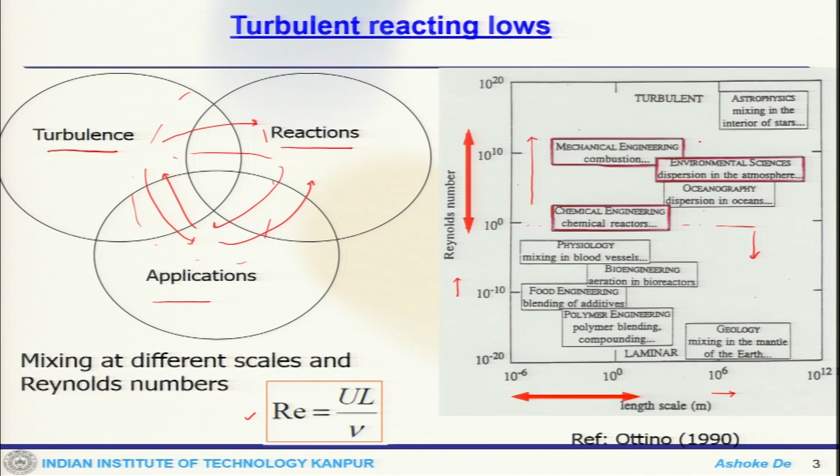Now if you look at the range of application, there is a wide range of application, and on this axis it is the length scale, and this is the Reynolds number. So this is the laminar zone. Below this line, these are laminar systems, but chemical engineering or chemical reactors, oceanography where the dispersion in oceans, environmental science, mechanical engineering, all these, this is the range where you actually see the impact of the large scale turbulence, and if the system is reacting, then the interaction is huge.

Now this is another picture of mixing layer, mixing in free shear layer, where the motion of the interface is visualized. You can see there is a structure here and there is a huge difference of the structure, and this is more or less chaotic in nature. And this is happening in a simulation, and in simulations depending on your grid or the mesh, this is what you see in grid generated turbulence, and this chaoticness shows in your result. But inherently you can observe the flow field to be chaotic.

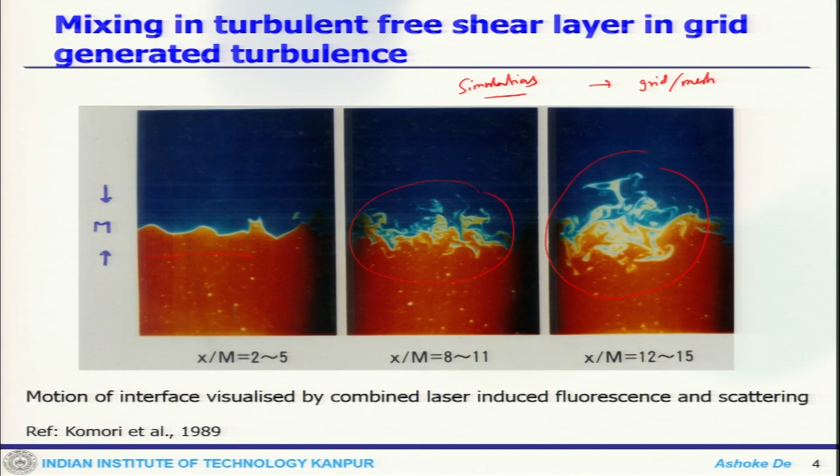Now again, just to recapitulate, this is what we have been talking about again and again. It depends on fuel and oxidizer mixing. We categorize them in two categories. One is the premixed, another is the non-premixed. If it is turbulent premixed, there could be spark ignition engines, gas turbine engines. Non-premixed, if it is turbulent, you have coal combustion, aircraft, gas turbine, diesel engine, rocket motors.

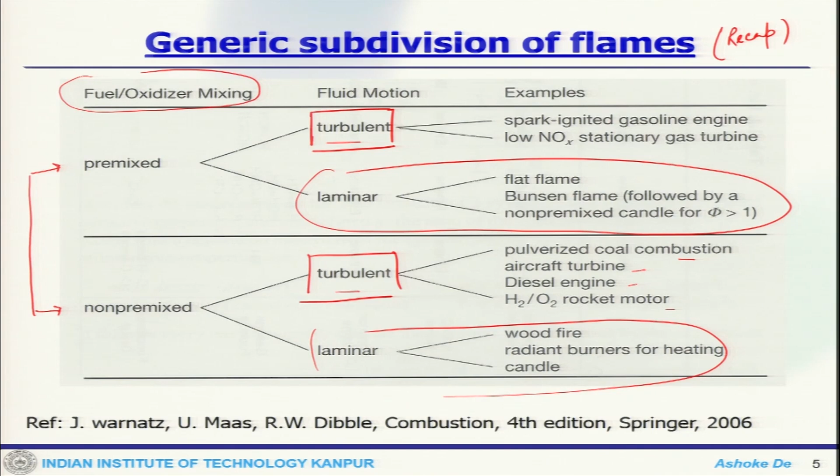So the laminar ones we have already discussed under laminar cases. So now we want to concentrate on turbulent premixed combustion and turbulent non-premixed combustion, and towards the end we talk about multi-phase systems.

Now this is another picture which is obtained from this experiment, where this is a laboratory scale burner. It's an unconfined flow or unconfined jet, reacting jet. So this is methane combustion. So the overall reaction you can think about as methane burning with oxygen producing this. It's natural gas, that's why we say so.

There are major species which are CH4, C2H6, CO2, N2, H2O, and there are minor species which are also involved in the reacting system like CH3, and the importance of minor species has already been discussed in detail when we talked about the kinetics and the impact of the kinetics, because these are the species or radicals which are formed and they help to propagate the reaction.

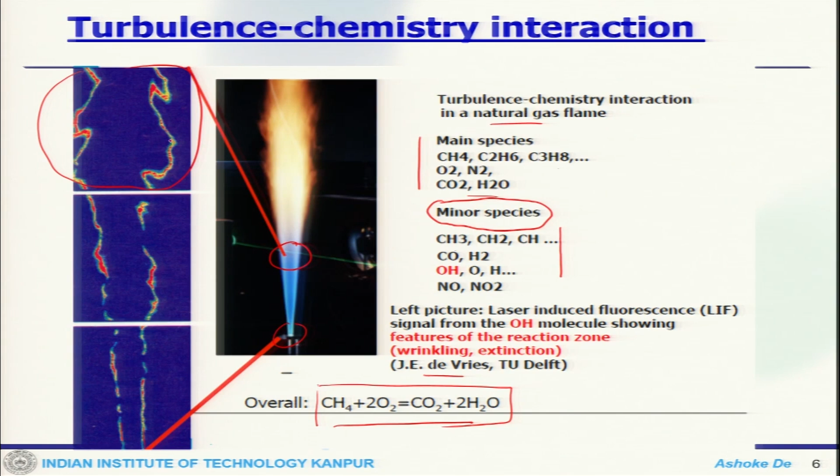So once we take OH images, this is the OH image which shows the reaction zone, and this picture corresponds to the spatial location here. Here you can see the jet is coming out, and the shear layer is nicely formed. Here something is distorted; you can see that because of the small scale eddies, or because of the turbulence, the reaction zone is distorted or wrinkled, whatever we say. So the impact of the turbulent flow field is clearly visible here.

Now again, the OH measurement for a burner: when you look at the reaction zone, this is at a time of 0 millisecond, this is at 1 millisecond, this is at 2 millisecond, and at 3 millisecond. It shows that at the initial stage there is a nice pattern of the flame, then probably there is an increase in the temperature, but at some point you can see there is a hole in the flame front, and this is clearly visible here.

So these are situations when extinction takes place. This is not global extinction, this is rather local extinction, because you can still see the flame front and reaction zone there. That is also a possible situation under turbulent conditions, and it happens because your flow field is turbulent. When the reaction zone or the flame front is interacting with the small scale eddies, you can have this kind of local extinction. So capturing or predicting this kind of local extinction is also quite challenging.

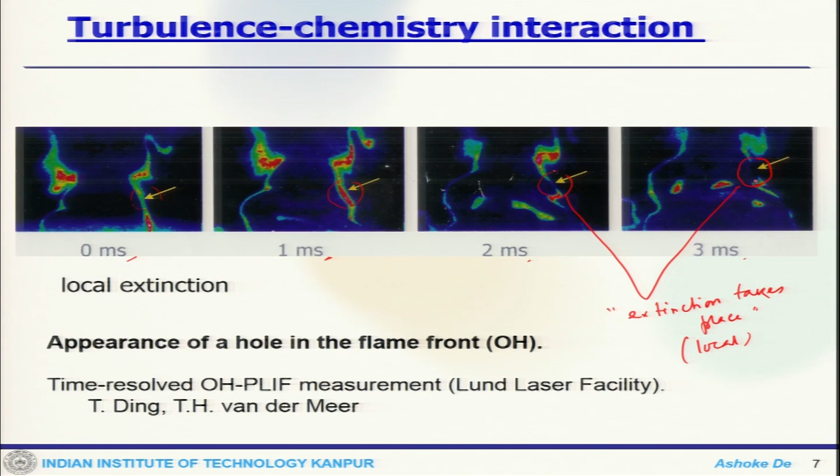So if you put things together in the context of gaseous combustion, if the flow is laminar, then you have complex diffusion properties. If the flow is turbulent, that immediately gives you a wide range of flow time and length scales. Because of these eddies, you have multiple length and time scales. So one can compare these two situations, laminar to turbulent, and see the immediate difference in the length and time scales.

And obviously, on top of that you need chemistry. There are multiple species involved in the reacting system, so there would also be a wide range of length and time scales. That means you have flow time scale, you have kinetics time scale. Then if you have added features associated with the phenomena, you can have radiation, which will have different time and length scales. You have soot, which will also have a different scale, then the coupling with other physics.

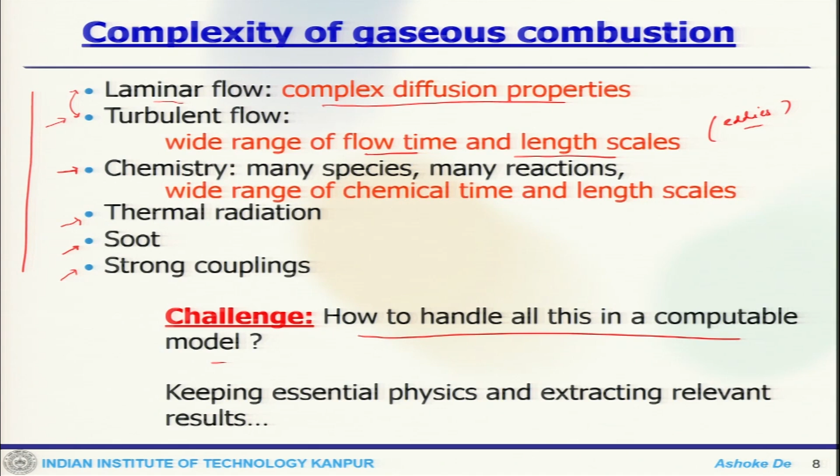So the whole point is how to handle all this in a computational model, because if one has to look at it in a computational field, then one has to deal with it. But when you deal with all this, you have to keep one thing in mind, that you cannot actually compromise on the physics. Your results should be reasonable enough that they do not compromise on the physics.

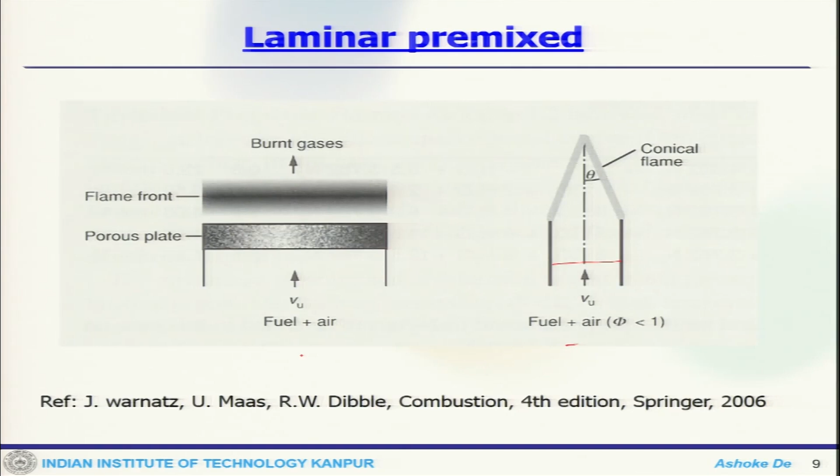So, these are the very unique characteristics of turbulent system. So, what it does at the same time, because of this interaction process, it actually increases the surface area. Now, the thing is that my flame surface can be wrinkled like this because of this eddies interaction. So, once you look at this effective surface area of the flame front, that actually increases. So, it increases the conversion; that means more surface area means your volumetric heat release will also increase.

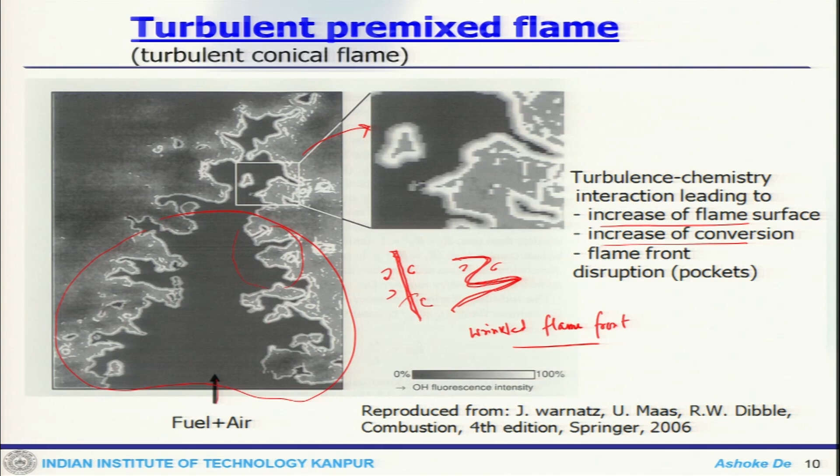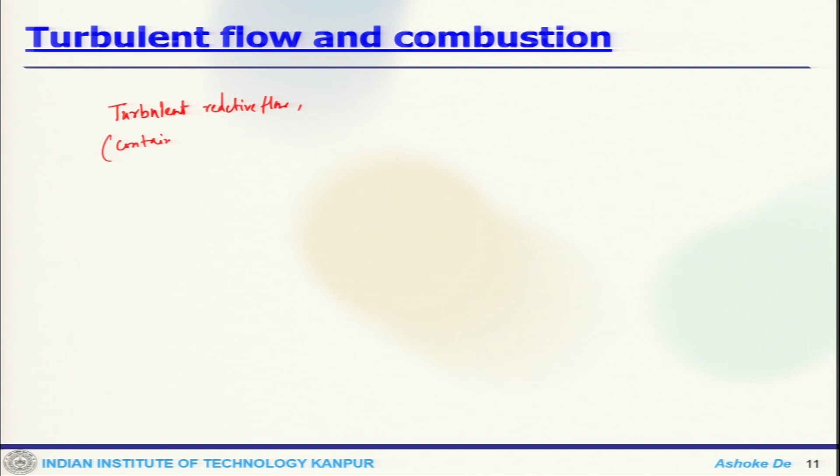So, that will also at the same time disrupt the flame pockets. So, one way or other, it is sort of a coupled system. Now, if you want to look at that combined effect, one can put that, okay, this is my turbulent reactive flow, which contains a spectrum of eddy scales.

So, that will allow entrainment of reactants by large eddies, leading to incomplete mixing.

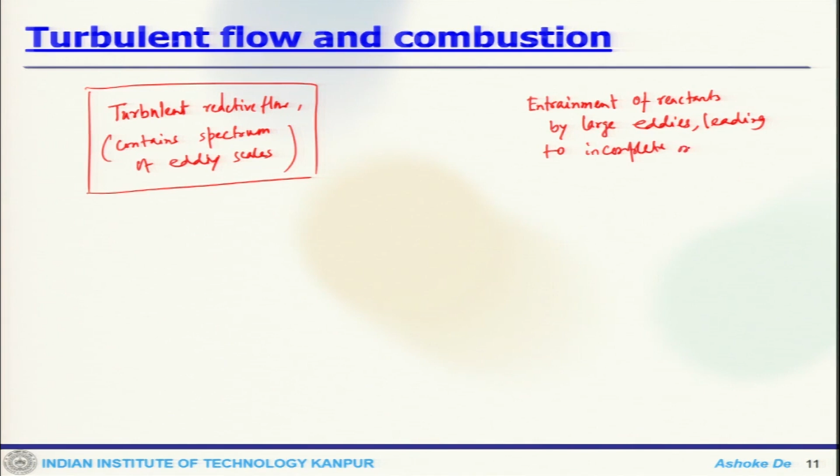So, you have different range of scales that will lead to isosurface stretching, enhancing small scale mixing, and molecular diffusion, allowing chemical reaction to take place, allowing chemical reaction to occur.

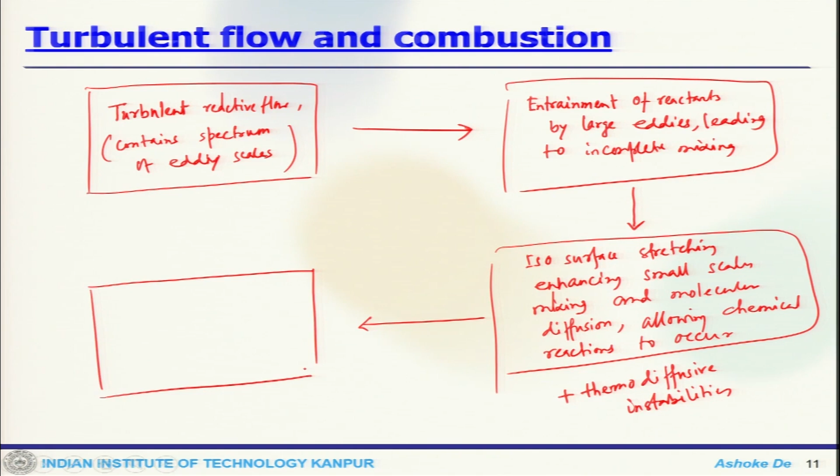So, this can add to also thermo-diffusive instabilities. So, that would go to heat release, which will lead to volume expansion and pressure changes.

Which modify turbulent flow. So, that again in turn has the impact on the reacting system. So, if you look at this complete picture, this essentially becomes a kind of closed loop in a turbulent reacting system.

So, you have a large range of scales because of the eddies. They allow mixing. Large scale eddies react to it differently compared to small scale eddies. Then your isosurface stretches, it helps in small scale mixing and your reaction to take place. Once you have reaction, you have a volumetric heat release. Due to volumetric heat release, your pressure changes, and also the local momentum changes. In turn, it changes the local behavior of the turbulent flow.

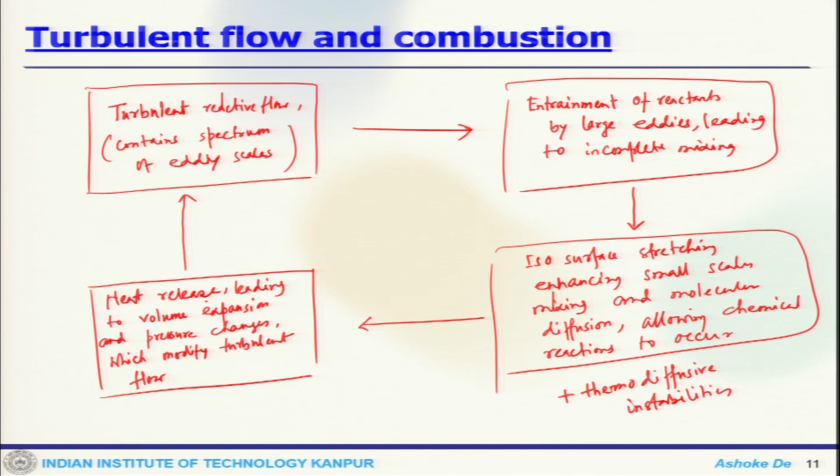So, on one hand turbulence affecting the reaction, on the other hand reaction affecting the turbulence. So, it's sort of a handshaking, and it becomes quite complicated because of different scales present there. Now, just some of these descriptions which we have already looked at. So, energy transfer is one important phenomenon here.

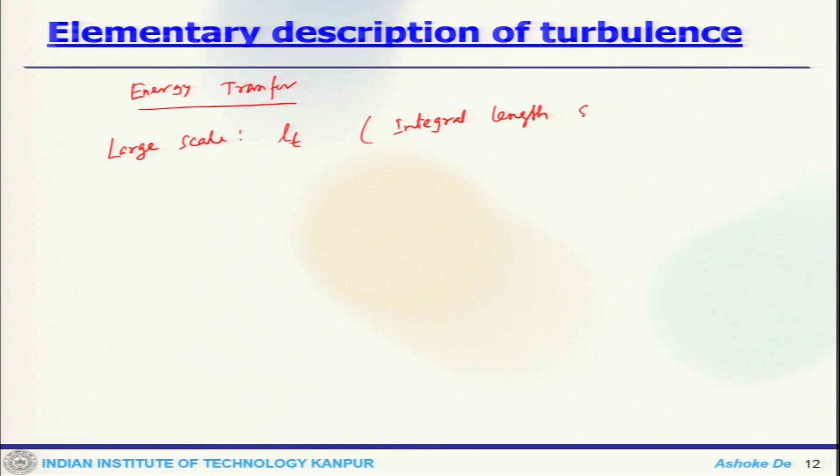From large scale to small scale, the energy transfer takes place, and at the smallest scales, which is the Kolmogorov scale, that is dissipated. Then the scales: we can define the large scale LT, which is the integral length scale. The smallest scale would be eta k, which is the Kolmogorov scale, and then the standard deviation of velocity fluctuations, which will be u prime, and energy dissipation, which is epsilon, u prime cubed by LT,

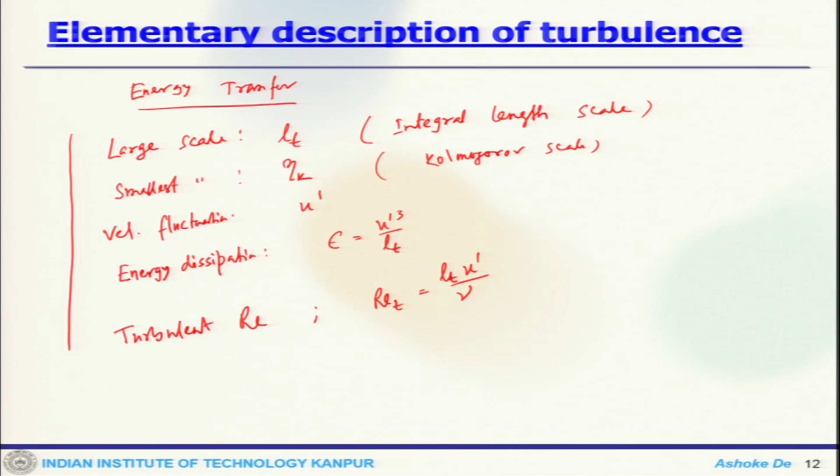and turbulent Reynolds number, which is defined as Re_T equals LT u prime by nu. All these issues like the scales we have already discussed in detail during turbulence. This is just to recap, because we are going to use these scales when we talk about these different aspects.

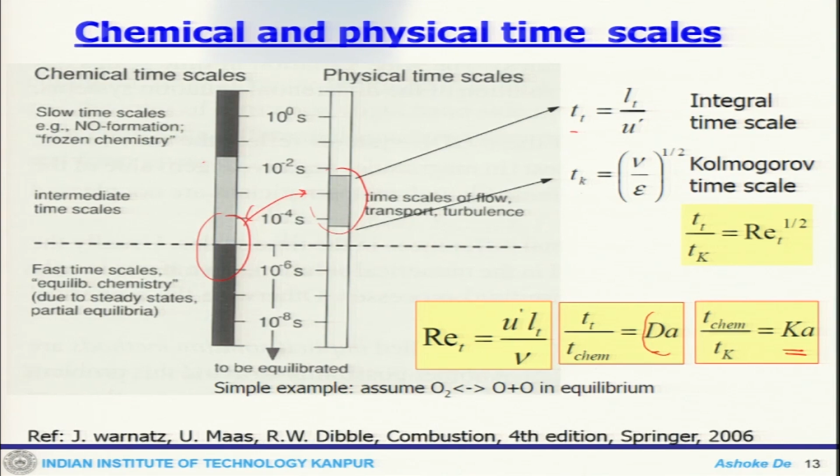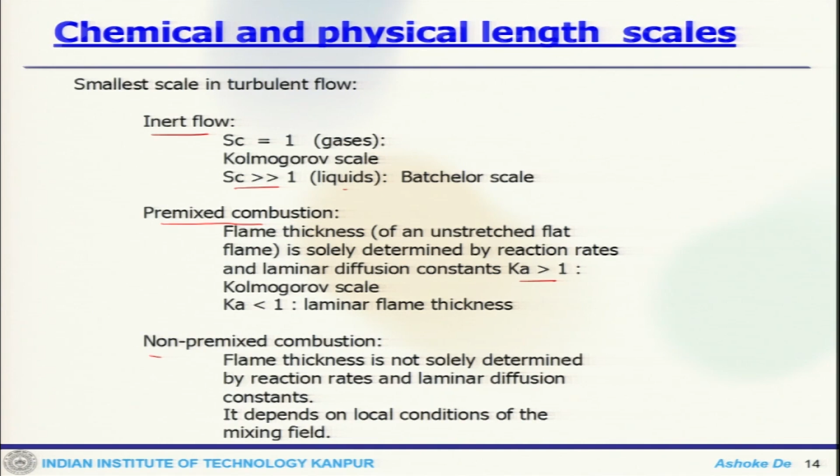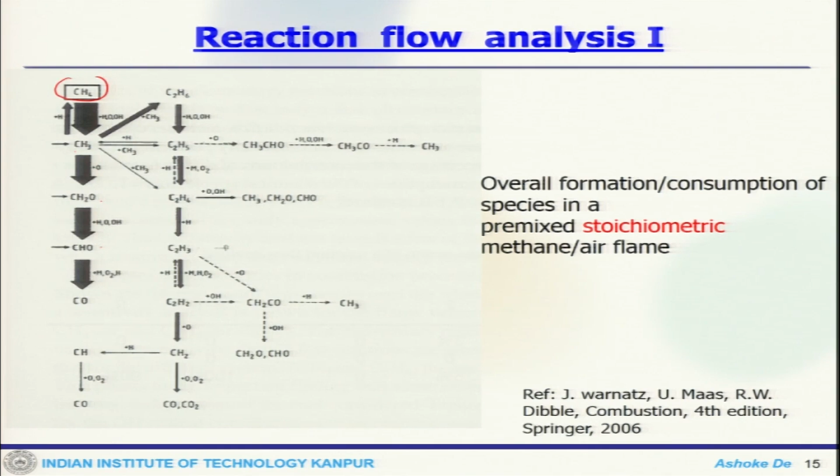So, you can see how this reaction pattern takes place. This is natural gas combustion. Already while talking about the thermochemistry, we got an idea that it forms CH3 radical, CH3 to CH2O, CHO, CO, and then it expands. So, this is the overall formation or consumption of species in a premixed stoichiometric flame. This goes through multiple branching. That is why we have seen the chain initiation reaction, chain propagation reaction, and finally chain termination, because radicals are formed in between.

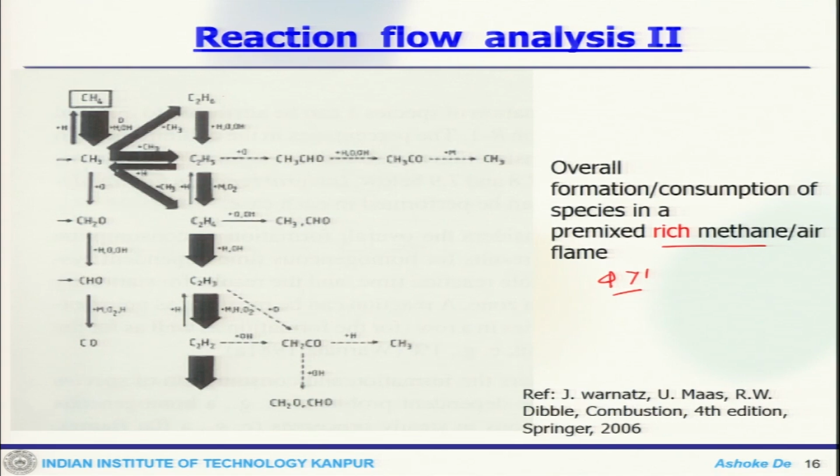This is a situation when you have a rich methane air flame, that means the equivalence ratio is more than 1, and there the intermediate species formations are quite different. But there would be species formation, because without the species formation the reaction cannot propagate. So, that should be there.

Now, if we put everything together and try to define this reacting system under turbulent conditions, we need some governing equations. First we need all the transport equations: mass, momentum, energy and species. These are the set of governing or transport equations needed to define the system, plus we need transport properties. These are also important, like viscosity, diffusivity, thermal conductivity. Then this can define the flow field.

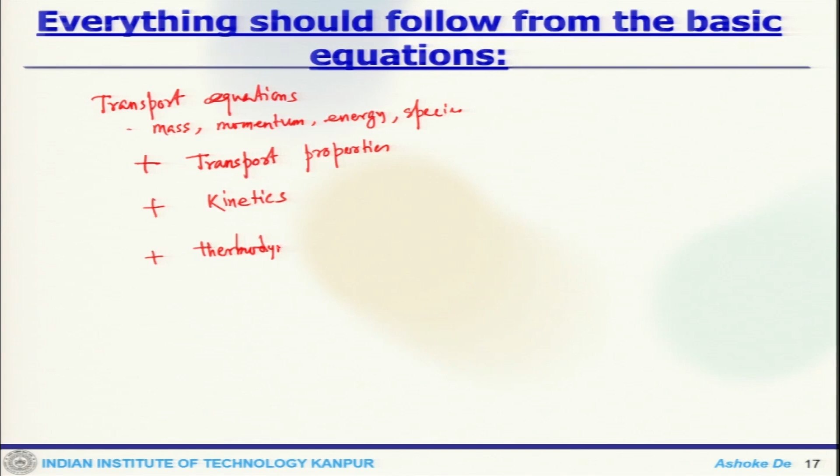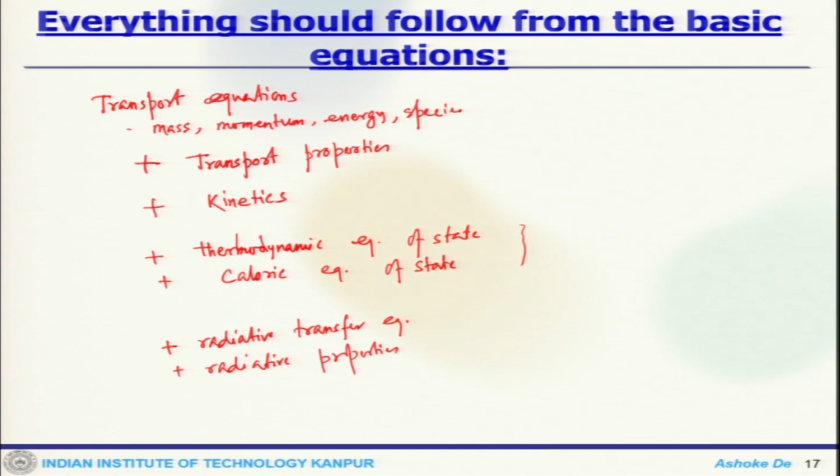We need kinetics, which is required to represent the reacting system. Then we need the thermodynamic equation of state and caloric equation of state, which will allow you to calculate properties. Then if you have radiation, we need a radiative transfer equation and radiative properties. So, this is the set of equations.

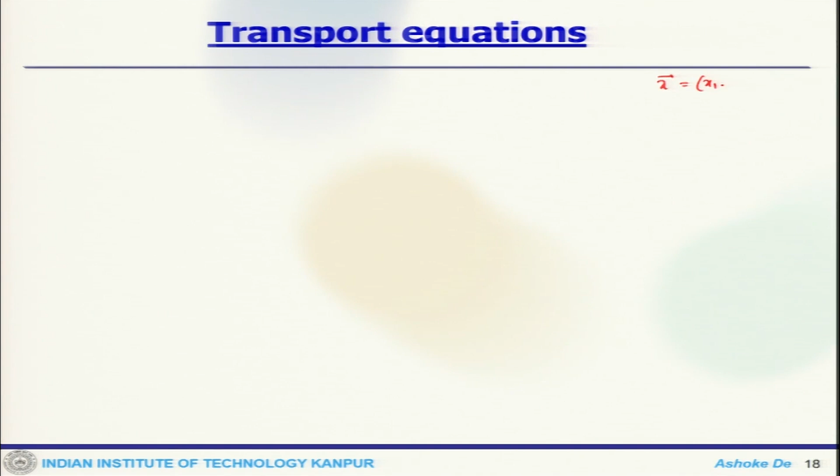So, quickly getting to the transport equations, we can say the coordinates are x1, x2, x3 and the velocity components are v1, v2, v3. Our continuity is ∂ρ/∂t + ∂(ρvj)/∂xj = 0. Momentum, or Navier-Stokes: ∂(ρvi)/∂t + ∂(ρvivj)/∂xj = −∂p/∂xi + ∂τij/∂xj + ρgi.

Yk is the species mass fraction transport equation. So, we can write ∂(ρYk)/∂t + ∂(ρYkvj)/∂xj = −∂Jkj/∂xj + ωk. And the enthalpy equation, where specific enthalpy is the sum of chemical plus thermal, gives ∂(ρh)/∂t + ∂(ρhvj)/∂xj = −∂qj/∂xj + Q + L.

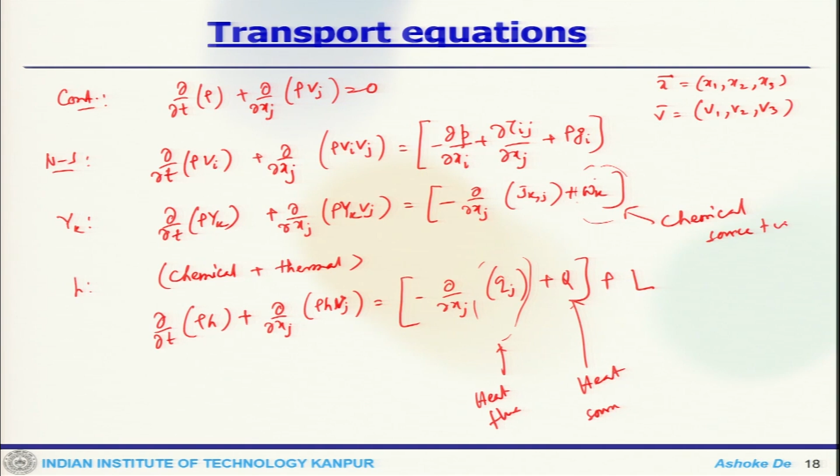So, this term is the chemical source term, this is the heat flux term, this is the heat source, this is the chemical source term. So, these are the set of equations that you need.